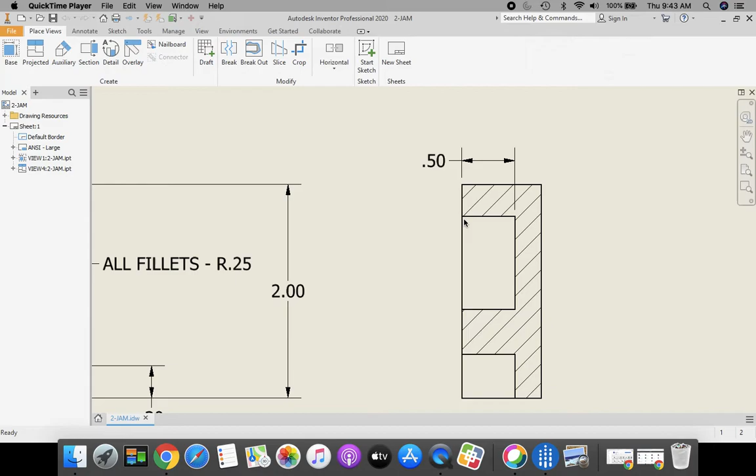Today I'm excited to have you try doing this standard IDW, making this drawing that you see in front of you. We're going to have you try creating a section view, something new we're adding. Remember we talked about section views because we are going to dimension how deep this pocket goes here, and it's never good practice to dimension hidden lines.

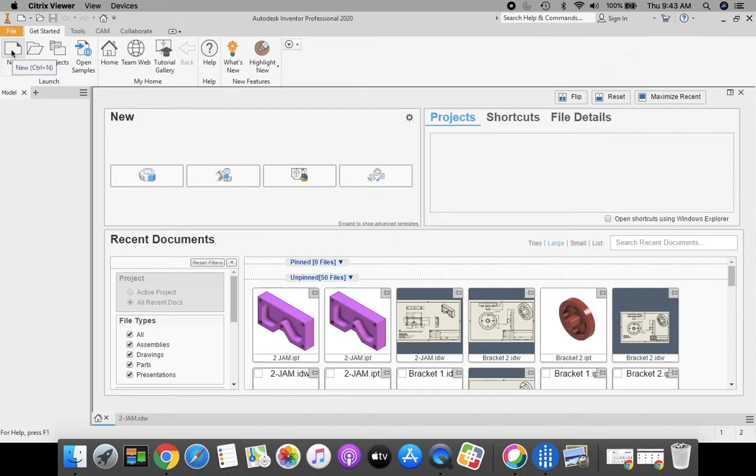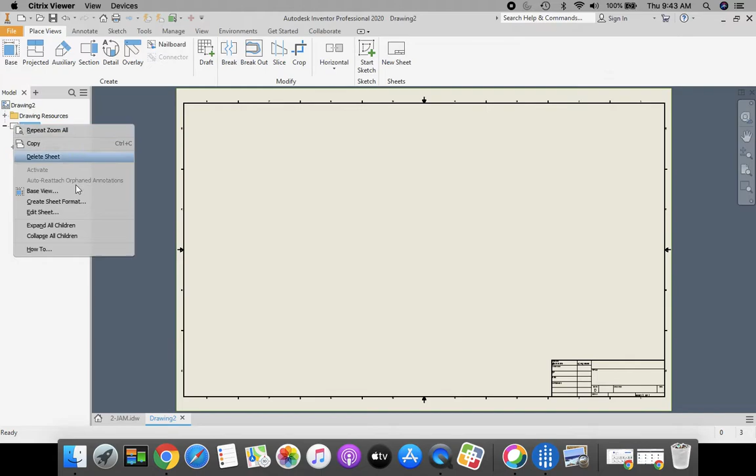Today we're going to start off on our home view, and we're going to come up to our ribbon bar at the top. We're going to select New, Standard IDW, this icon right here, and click Create. Once again, we need to change our sheet size. It starts off as default as a D size sheet, so we're going to come to the model browser bar on the left hand side, go to Sheet 1, right click, Edit Sheet. Here we're going to change our sheet size to size B and click OK. Okay, looking good so far.

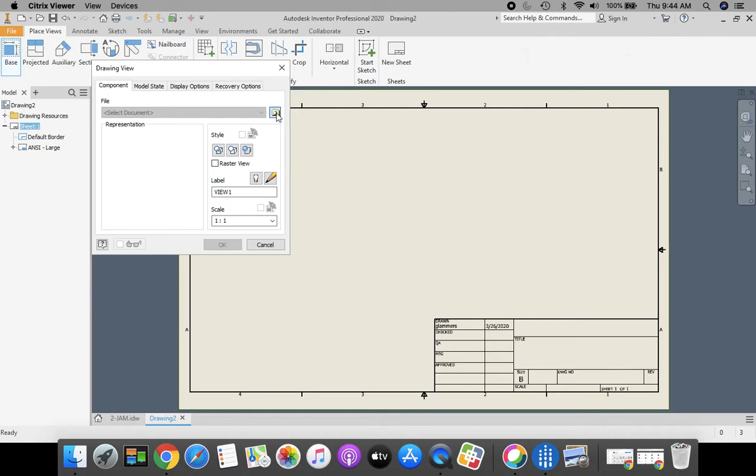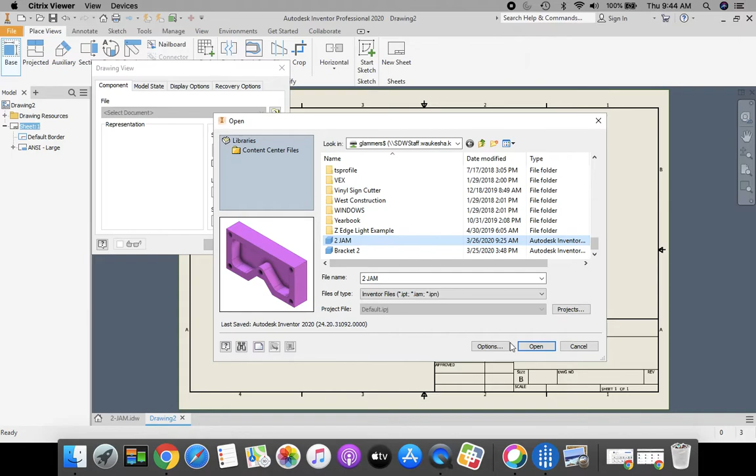Next, let's go get our 2 JAM part. We're going to come up to our ribbon bar, click our base view and select that. Then we need to go to our browse folder, the magnifying glass in the folder, to open our file. We should automatically go to our H drive, this gray box with the green line underneath, first initial last name 000. If that doesn't automatically come up for you, click on the pull down menu, and all the way down to the bottom is where you're going to go. In your H drive, find your 2 JAM part and click Open. Once we have that selected and identified, click OK. Take your cursor, get the red dotted line that goes around the perimeter of your object, and click and stretch this over to the left.

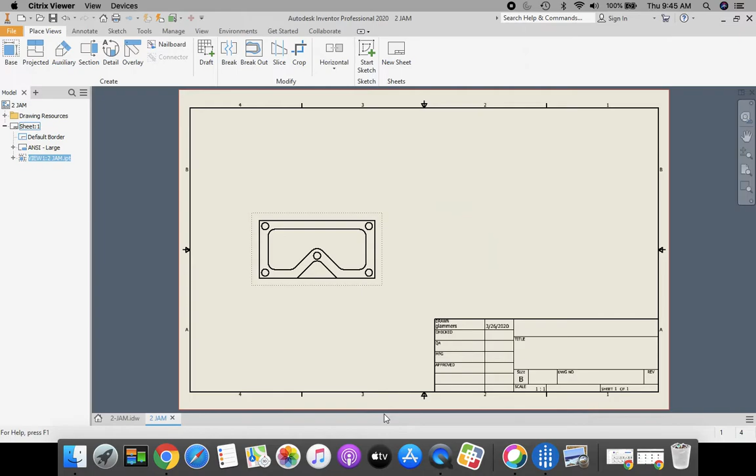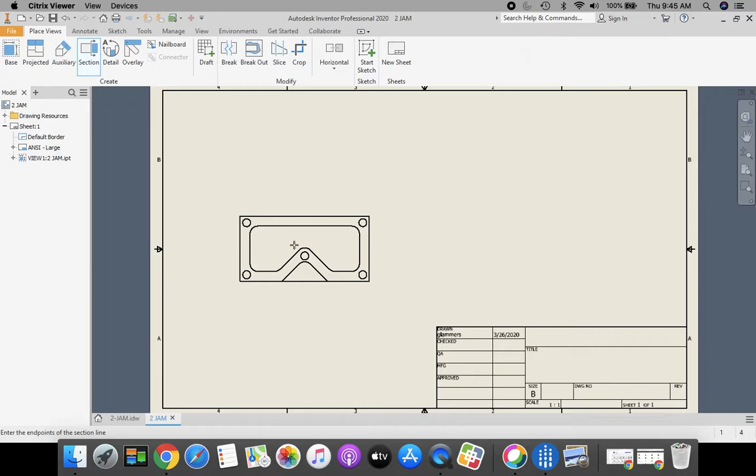Now let's talk about creating that detail. Up in the top here we have a couple different views. We've used base and projected view before. Now we're going to come across and choose section view. This shows the internal detail of a part. So we click on section view, and come over here. I'm going to zoom in on that a little bit for you. I want to have my mouse kind of in a vertical line that I'm going to end up cutting through, in this direction right here.

So I'm going to click and start making my line come down. This is where I'm cutting through, and that looks like a pretty good place to cut. If I'm not happy with that, I can always press Escape, click Section again. Once I get that plus mark, I'm going to click and draw that down, trying to stay on a vertical if you want. Get your little icon changed to a plus by clicking, then stretch that coming down. Once you're happy with where you're at, click to place that line, then right click. Those of you on an iPad might have to go up to the top, use that little window shade pull down, and select your mouse to get your right click.

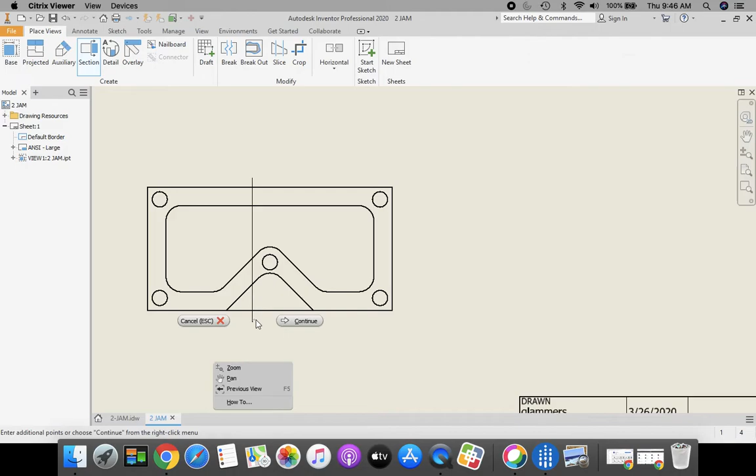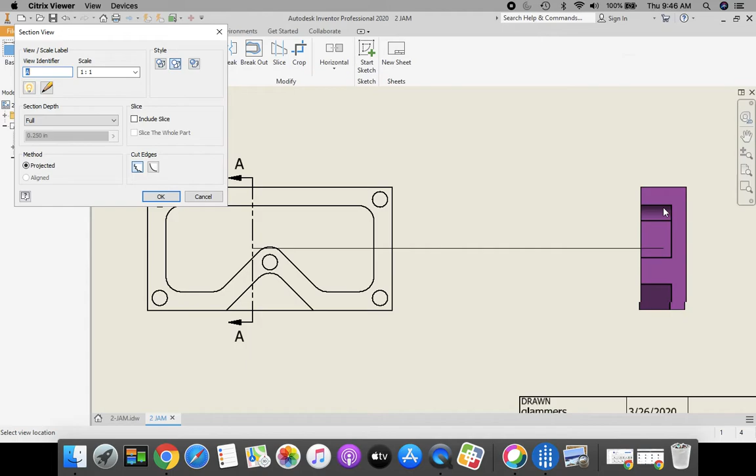Then select continue. Automatically it takes and positions my section view line, so you can see my cutting plane line. Let me move that off to the side. You can see my cutting plane line here. I'm going to take my detail and move it off to the side, click to place it. Nothing to it — that's how we make a section view.

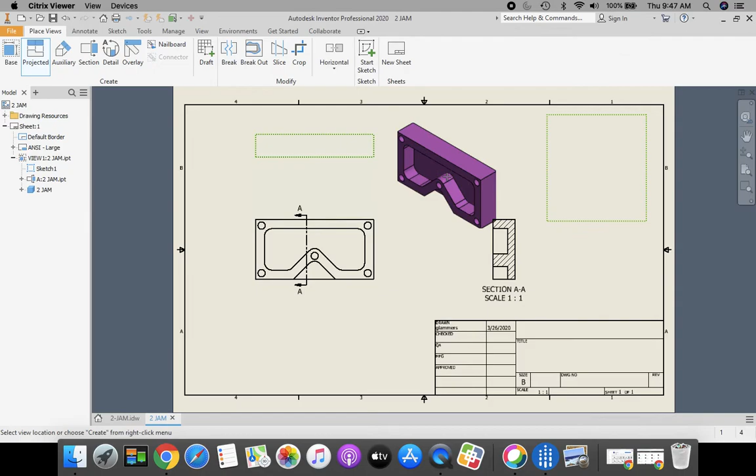Okay, let's go back out. Now let's take care of the other view. We need a top view up here, and we need a pictorial isometric. In order to do that, we're going to click our projected view. Now when I selected my projected view, it doesn't automatically have that icon or image attached to it, so I need to come down to my front view, click my front view, and now I have that attached here. So I'm going to position my top view, click to place it, and I want my pictorial isometric view, click to place that as well. When I'm finished, I'm going to right click and select Create.

Now, according to the dimensions shown here, you'll be placing these on your drawing. I'm going to place those on as well. These notes and the techniques learned, you don't have to add those on.

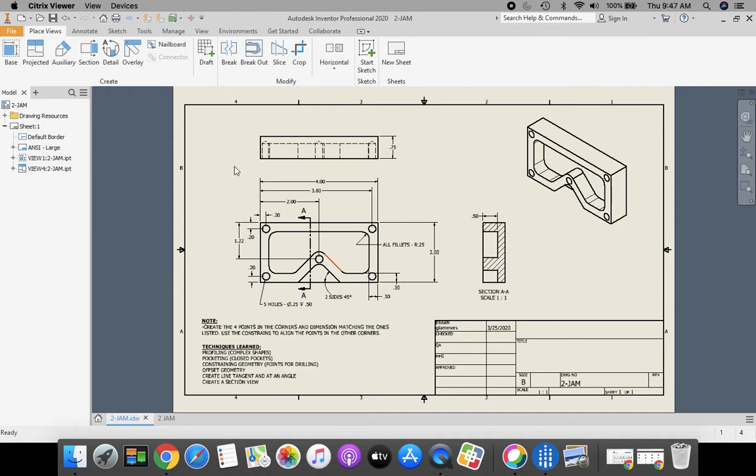Let's go back to our drawing. I'm going to go up to the top above my ribbon bar and select Annotate.

Coming in on my top view, I need the Dimension tool, and I'm going to dimension the right side of this top view. That shows me my extrusion depth.

This is where our detailed version, our section view version, comes in, where I can actually dimension to get the depth of that pocket.

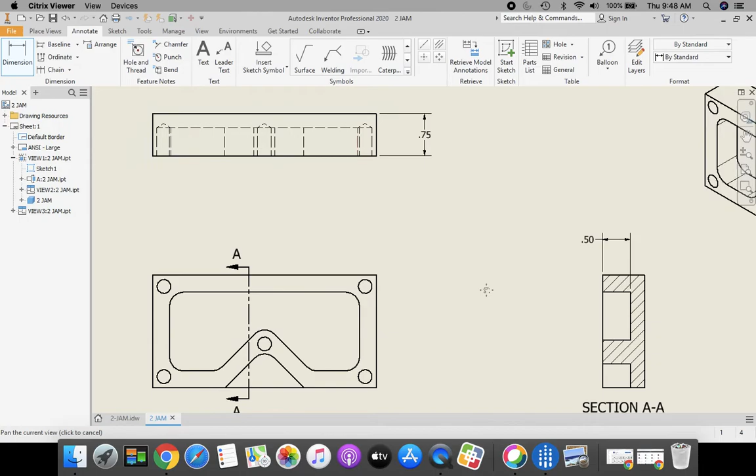Now I think all the other dimensions we have on our front view, so let's start placing some of those on.

Using the Dimension tool, I'm going to dimension from the hole to the side, and from the hole to the top.

All I'm going to do is keep placing these dimensions according to the same location they are on our part. This shows us our offset.

What else do we have in there? Okay, nothing too bad. I need the vertical one for our hole.

Now let's take a look at our hole and thread tool. For dimensioning, since we have holes and threads, we're going to place this on here. Bring that down, that looks like a good spot.

Let's see what else we're missing. We could do this angle dimension in here. So let's go back to our Dimension tool, click on your angle line, then click on your horizontal line.

Now you see how it puts the 45 degrees on our block - that's just the order we selected in. Let's do our bottom line first, then our angle line, and see how that takes our 45 degrees and puts it on the outside now. That's a much better spot.

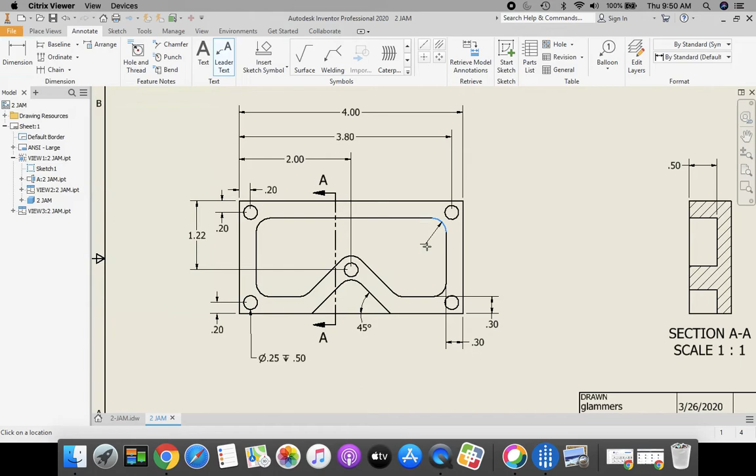To get our fillet definition in there, we're going to click on Leader Text, and we're just going to come in here and grab one of our areas. Press Enter on the keyboard when you're done.

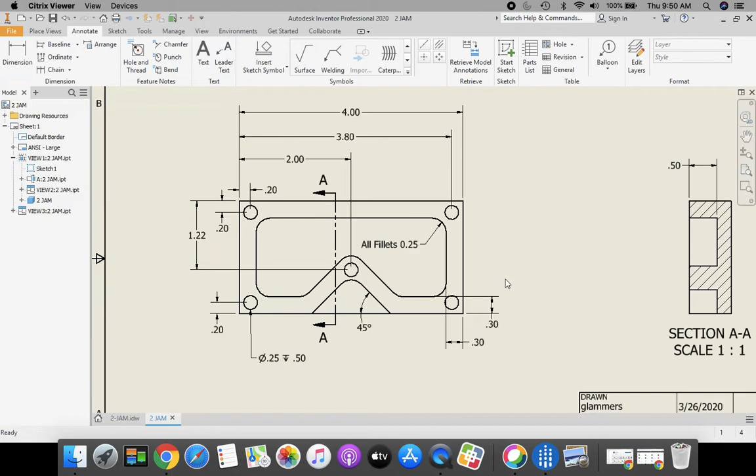And then we can type in all fillets 0.25. We can move that off to the side.

Click on your text, click on your text, and you can move that out to the side. See how I'm grabbing that little green dot right there?

Another way you could do this - I'm going to delete that. If you grab your Dimension tool and come onto that circle, not getting the green dot, it automatically places it on there for you.

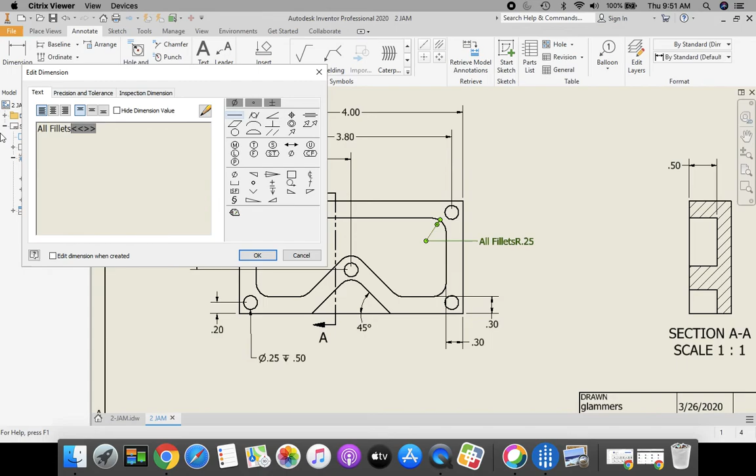Then you can grab your text and move it off to the side, click on your text, put your cursor in front of the default text, and type 'all fillets.' Click OK. Both ways are acceptable and fine.

Now we have that part done. Let's get it prepared in order to turn in.

First thing we're going to do is save it. We're going to go up to the orange file in the top left hand corner, click Save File, and go down to Save As. Once again, this is going into your H drive - first initial, last name, 000, gray box with the green line underneath it. File name is the same as 2Jam. Is great, click Save.

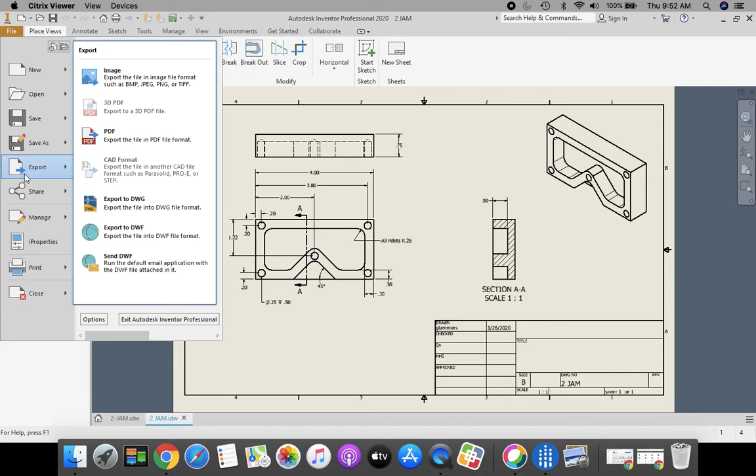Now we're going to make it a PDF. Go up to the top orange file in the top left hand corner, go down to Export, and export PDF. Make sure this is going into your H drive, and click Save. Great job.

We created that offset part. We used vertical and horizontal constraints in order to constrain these four holes in the corners. We did our offsetting lines, and an angular line tangent to a circle at a specific degree.

And on our drawing, we created our first section view. Pretty awesome.